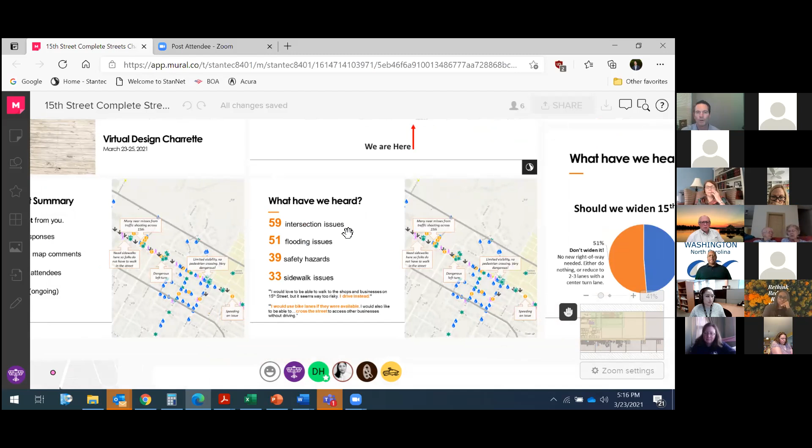So a lot of this information, I won't go through all of it, but it helps inform where we deal with issues—it could be walkability, getting across the road, flooding which happens along this corridor, lack of lighting, we've heard almost everything. What's predominantly what we're hearing is the safety issue. I think everybody agrees to that. Even NCDOT agrees that safety is the number one problem along the corridor. So we've heard of flooding issues, safety hazards, even walking—there's a lot of gaps in the sidewalk and the like.

As you look a little closer into this, I'd be remiss if I didn't mention—we asked folks specifically, hey, the last time they looked at widening this project, it took well over 60, 70 feet of additional right-of-way. And I think that was just too much for the community to absorb. But there's still a contingency out there that said maybe widening's not a bad idea, but keep in mind, anything you widen, you go outside of the right-of-way, you're going to have to take private property. You'll have to take parking. You most likely may take a building.

And I think that's one of the things we're trying to steer around and avoid. Doesn't mean we won't take something in terms of maybe a sliver, but hopefully a sliver of right-of-way. The other half of the contingency says let's repurpose some of that asphalt, repurpose it and see if we can use it for different amenities, different treatments, maybe for bicycle and pedestrian. That's really the number one thing we heard. So there's really a divide about whether to widen it or narrow it, and we'll keep it at that. So next, naturally, we got to ask those tough questions of why.

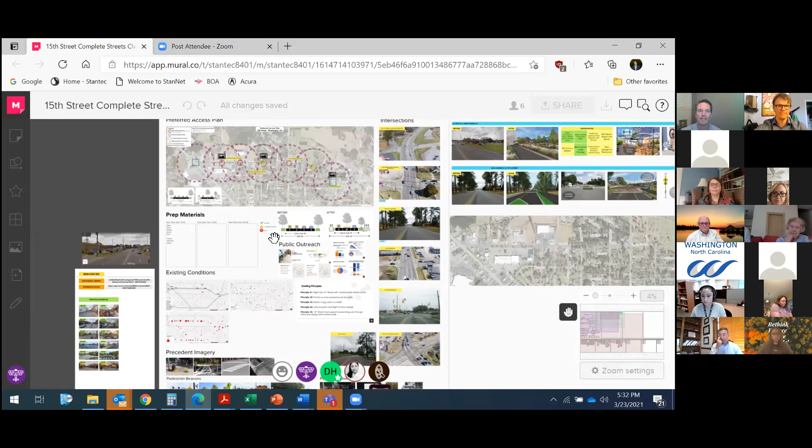All right, here it comes, folks. We're gonna get down to the nuts and bolts at this point. You know what, Mike, one second. There's a comment. It says, does a 51-49 split for widening the road not warrant a larger sample size?

Well, sample size is different than the percent split. I would have to say, granted, this is not a scientific survey. You want that? We'll have to get a whole new company to come do that. But out of 408 responses and 200 comments on the interactive mapping, as well as the folks that went through the instant polling on the surveys from the Project Symposium, I think that's a pretty good indication that you're balancing that, right? And again, I'm not putting too much emphasis on the 50-50 split on whether to widen or not take any additional right of way. I'm just pointing out that's what we're seeing in the results.

So that's a good point. Did you want to say something? There you go, go ahead Pat.

I would just say, you know, I think you look at our survey results in the broader context of the whole survey, right? 51-49 doesn't really indicate there's consensus one way or another, but we would look at all of the questions as a whole to say, what are people concerned about? If we're saying we don't know if we want to widen it or not, what are the other things people are clearly saying, yeah, this is a problem we need to solve? So you look at the problem of 4 lanes with no center turn lane, the fact that turning crashes are the most common crash on that corridor, and that people are very concerned about taking property on either side of the corridor.

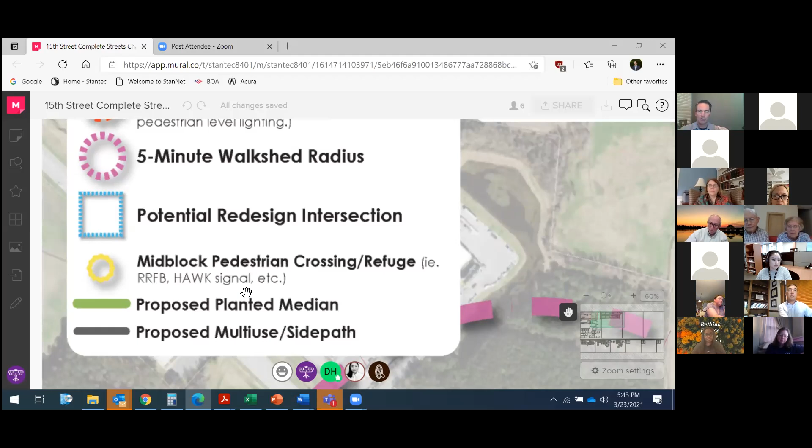Next, we have mid-block crossings, these areas denoted by yellow. We're introducing 2 mid-block crossings. If we reduce this down to 3 lanes, 2-lane divided, we want to provide better opportunities for people to cross. There are 2 locations along this corridor where we're suggesting a mid-block pedestrian crossing with a rapid flashing beacon or a HAWK signal. That's just an actuated signal that a pedestrian or bicycle can kick or punch, which tells people they have to stop to let them cross.

Next, we are showing segments of planted median. These are just pockets of median, again to provide that sense of enclosure, and also to provide pedestrian refuge for people getting across the road. Last but not least, we're proposing that multi-use side path, 10 feet, along the entire corridor.

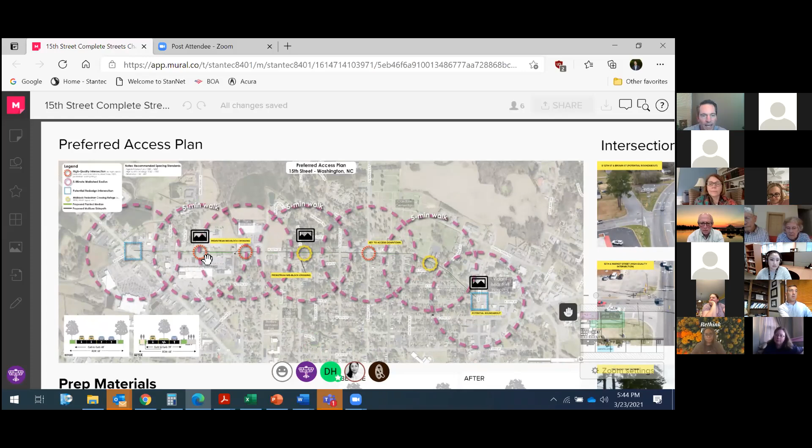So when we look at it holistically, this is what it looks like. Now you can see at the end we've got the redesigned intersections. What that looks like, we'll probably determine tomorrow based on your feedback. We have the red existing signalized locations, and then we have these two proposed mid-block crossings.

And why that's important is this: we have certain locations, we have a market over here, and then we have the Tractor Supply intersection here. But that's a huge gap to ask someone to walk just to cross the road. We need something in between to allow that to happen. This is Van Norland, is that right? So that location is where we're proposing a mid-block crossing. The other location is between Market Street and Brown Street, we just picked a distance between the 2 points and put another mid-block in there.

All right, I'm going to stop there, and then we're going to show some photo sims of what this could actually look like. Again, this is day one. As we move along, you'll see more and more designs that we can share with you. So I apologize, Dan, anything in the chat box?

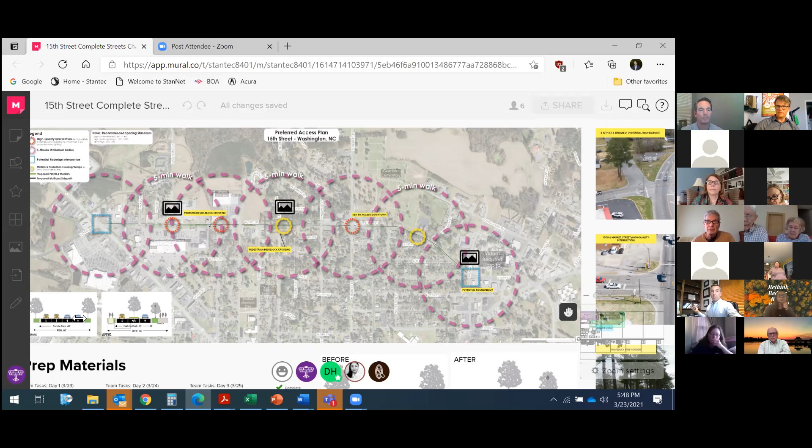Everything you saw in that cross section, let me show that, because a couple of people asked the same thing, and I want to make sure we're not confusing people. This is the before. Right now, the state owns and operates 60 feet of right of way. We're actually taking this curb and gutter inward, not outward. So we're just repurposing that 60 feet. Isn't that wonderful? No one's losing any driveways, no one's losing any yards.

I guess my only question regarding that is, it would be interesting to look at this final 3-lane design superimposed on the current curb as it is for those particular residences. And maybe you can do that at some other point.

Right, and guess what, Ned? You fed right into it. We're actually going to design that over the next 3 days. Our engineers are working on that as we speak. I don't have a rendering of that yet, only because this is day one. Wait for day 2 and day 3, but we'll absolutely show that. Because honestly, as an engineer, I want to show the physical footprint of these designs. So we're doing this in what we call CAD and MicroStation, computer aided software, so we can actually show the physical footprint of those impacts.

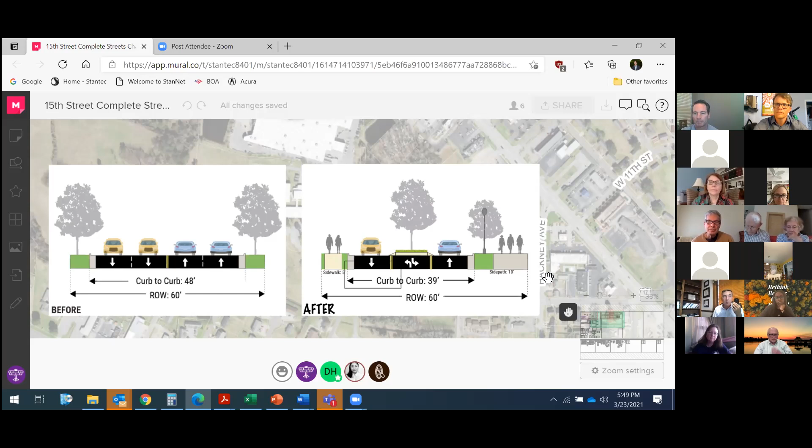At the intersections, you might see some impacts to even some private property. That's to be expected. But along the corridor itself, we should be able to minimize the impacts and avoid a lot of those impacts on private property. So more to come on that, and I apologize, I know we're eager to see that.

So I'm going to jump right into... let me see if there's any more comments there. You got one more, Mike, an important one from Dennis, but you've also got Mary, who's been raising her hand. Mary, I can't see everybody, but good to see your face, Mary Day.

Go ahead, Mary Day. I was just wondering if at some appropriate point you could show us a picture of, or describe, these main intersections, say the one at Market Street and 15th Street, and tell us what they might look like whenever that feels appropriate.

Yeah, that sounds good, we'll do that in a second. Next question, Dan. There's a question asked from Dennis, following up from his question earlier on complete streets. He asked, would a complete street design adversely impact congestion? Because that could impact how it's scored in the SPOT process and potentially make it more challenging to get funding. So I think this is ultimately a question about funding, but also about congestion.

Yeah, so here it is, Dennis. We actually reviewed the SPOT analysis. For other people, let me explain what SPOT is: the SPOT prioritization is the way that NCDOT, the Department of Transportation, prioritizes their different projects.

A lot of it has to come from congestion or safety: relieving traffic, addressing a high crash location or incident, or flooding and things that could cause accidents. Unfortunately, that's what they really hone in on. You get very little value for multimodal, although there's thumbs up for multimodal complete streets applications. But for the most part, the DOT understands the data they collect predominantly relates to congestion, traffic, and crashes.

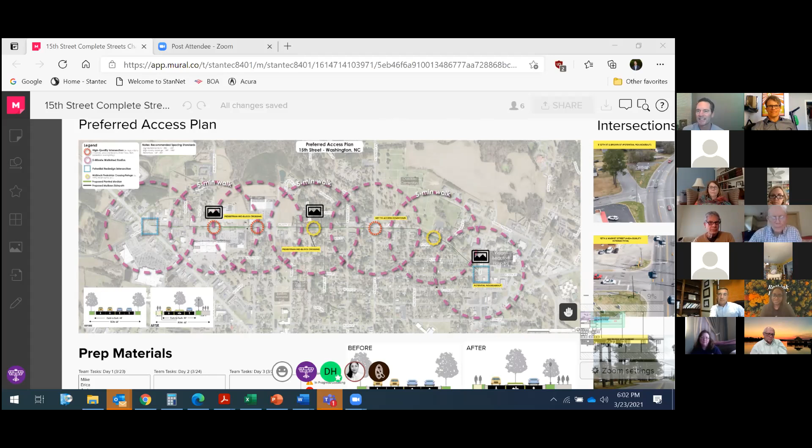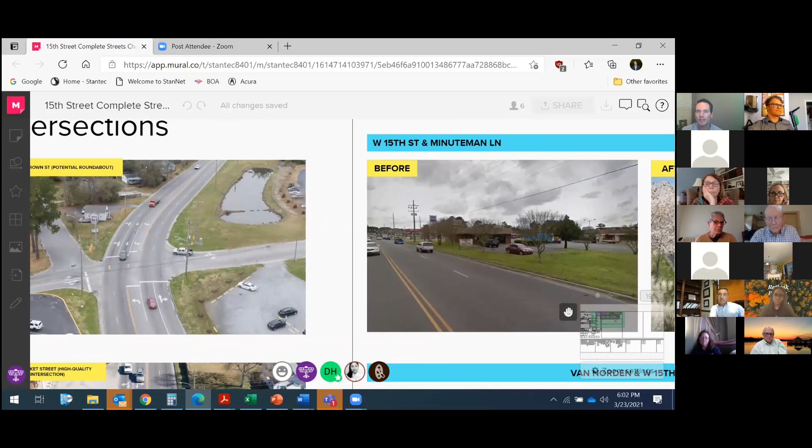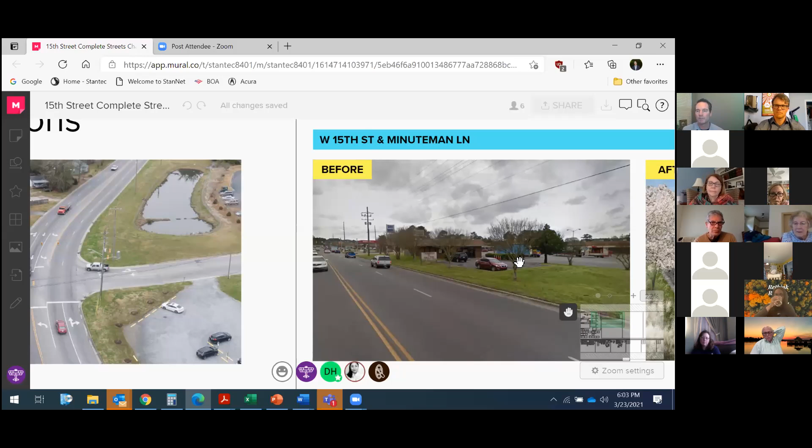What I want to show is a perspective of what this corridor would look like. This is 15th at Minuteman Lane - the shopping center I was referring to, the Beauty Supply. There's a Mexican restaurant here too, it's turned over so many times, it's seen its day, probably not the highest and best use. We want to show what this corridor would look like with our road improvements, as well as what could happen through reinvestment along the corridor.

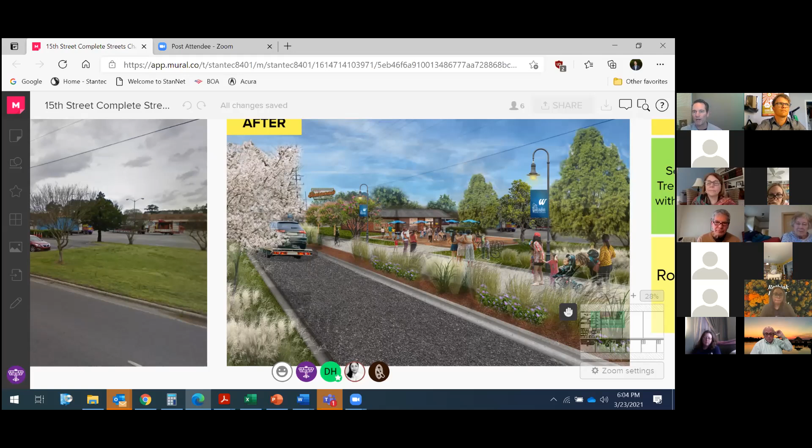When you zoom in here, we took some artistic liberty, but now we have the two-lane divide - this segment has no driveways, but we also have the multi-use path, the side path where people can walk, jog, or ride a bike. Beyond that we have pedestrian level lighting. Granted our streetscape and planting may not be this glorious, but you get the feeling it'll be a separated facility with pedestrian level lighting and nice banners welcoming folks to the city of Washington.

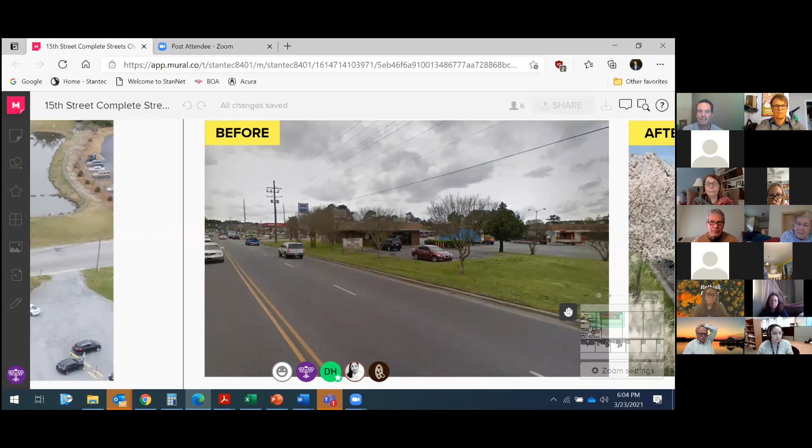Remember what this looked like over here - a sea of parking, nothingness. No one's doing anything with this hardscape, no one's really interacting at this location. In fact this is turnover after turnover of business that just can't make it here. What would it look like if you really made it a vibrant space with outside seating, which this place is crying for, even keeping it a taco or Mexican restaurant, but allowing great things like bike parking, kiosks, and shade trees so people feel shaded. What a wonderful space for people to congregate, have lunch, and enjoy that space in a different way.

Beyond that, we have some design notes to share. It's really just adaptive reuse of the excessive parking, outdoor dining - that's the recurring theme we're seeing here. We're not saying tear down your buildings, just repurposing some of the stuff that's out there. Long-term, as property values increase and some properties want to turn over or do something different, you've got a lot of green space too. We can most likely see that occurring.

So use native grasses and street trees that integrate well. I think we heard that from the beautification and historic district folks. Maybe even use some of the design palette along 5th Street and Main Street and the downtown district so we're not reinventing the wheel - street trees, median and ornamental trees, providing the pedestrian or street tree canopies so we have some shade along the corridor too.

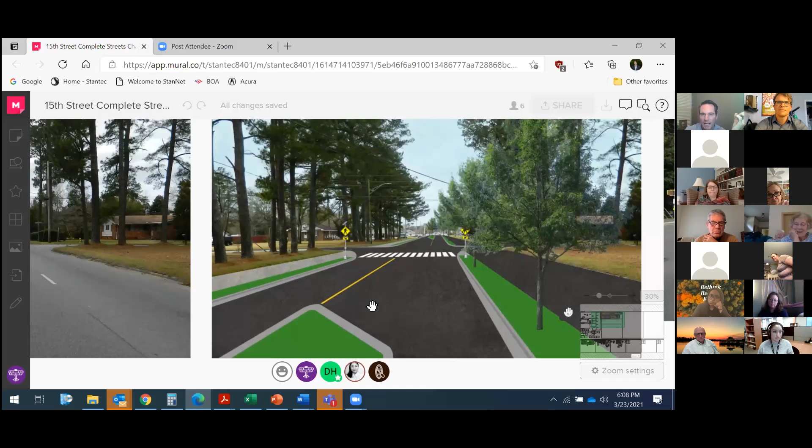And what does that look like at Van Norden? This is kind of what it looked like - this is the first phase, you can tell our designer's not finished with this, but you have the pedestrian here. This would have to be a dedicated left turn lane - I think Betsy brought that up. You have to have some stop bars. This is a rectangular rapid flashing beacon, it meets MUTCD standards. These street trees probably wouldn't overhang or anything like that, but again you see the canopy effect - it would actually be a through travel lane on both sides. Then the walkway over here, we'll probably have to redesign this a little bit to make sure you get the adequate spacing you need. But you can get a sense of what we're trying to accomplish here and create a more workable space.

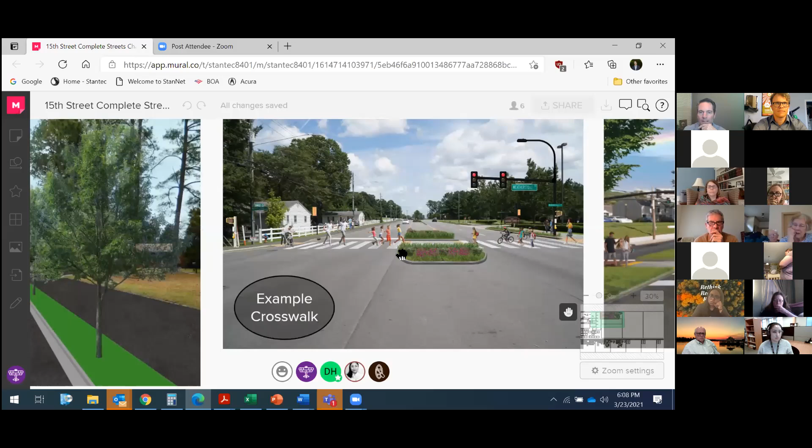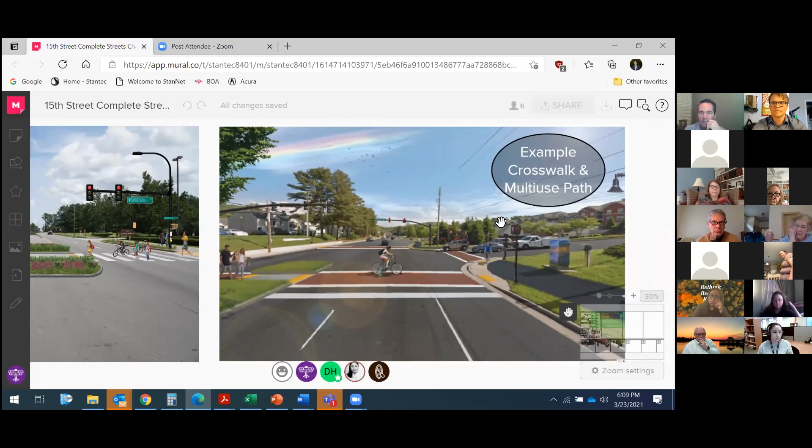This is kind of a pedestrian crosswalk here, pedestrian refuge. As we do the crosswalks, you see more example work, really using different textures at crossings along this location, just to show you different features that could be embedded in here, like pedestrian countdowns, tied in nicely with some mast arm signals. This is an example of a rectangular rapid flashing beacon - again these are actuated. If you're a bicyclist or a pedestrian, you can kick it if you're on a bike, or push the knob and it'll activate for you.

And these are some other perspectives. So tomorrow you'll see some of these other interesting perspectives come to life as we show more design features and as we look into it a little bit more.

So I'm going to stop there, zoom out a little bit. I know this can get kind of uneasy, but let's go back to the chat box. And you were doing great on time, by the way, we're a little after 6 o'clock. So I know we don't have a whole lot to show you, but that kind of concludes what we're showing tonight in terms of design.

All right, yes, we got a yes on that. Perfect, Emily, I'll buy you your first taco and your first beer there, hopefully when that redesign's there. All right, so I'm going to stop there before I get in too much trouble.

Any other comments, Mary Day? It looks like you're unmuted. Yeah, I was just asking the question again about North Market Street intersection. Are you ready to talk about that yet or not? Mike, now you're muted. Yeah, we don't have any renderings or anything, but what would you like to talk about? I just wanted to know what you have in mind. Is it similar to what's there now or different?

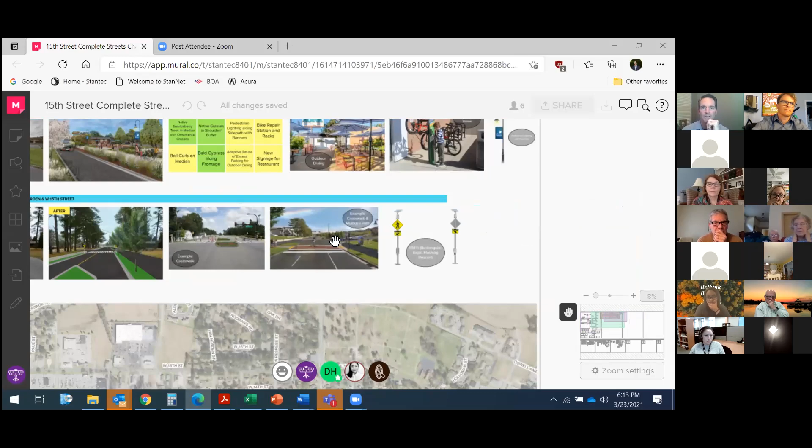What do I mean by that? Last but not least, I talk about these types of features here. These are mast arm signals. They clean up, they get rid of the wires, and they clean up this, what should be a beautiful corridor welcoming people. So Mary Day, that's the other design feature that we would advocate for.

And really nice, high quality, ADA compliance. You can see all the features that you see here, we would advocate at that intersection. That's your biggest major intersection outside of Brown Street and outside of Carolina Avenue. Good point.